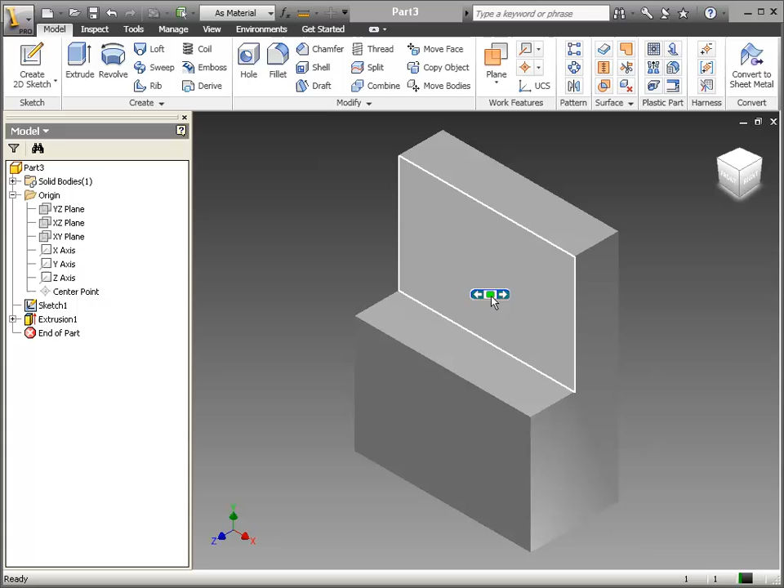Let's first start by drawing the two small holes on the top part of this object. So we're going to create a new sketch. That's another nice thing about Inventor, is we don't have to fool so much with the user coordinate system by moving it around or making it parallel to certain parts. We can just create a new sketch and actually pick the surface where we want to sketch from.

In order to place something that Inventor will recognize as a place where to put a hole, we need what's called center points, or just a point. So if you're not on the sketch tab, be sure you click there now, and then under the draw panel on the ribbon you should see the point, center point command. Let's come in and place this.

About an inch down and an inch over, and we need two of these. Technically our center point should be 3/4 of an inch over, but we'll see how to adjust that in just a second. One nice thing about Inventor, even though we have our center points too far to the left and right, we can adjust those by using a dimension.

And dimensions in Inventor sketching is different from drawing a dimension in AutoCAD, or even drawing a dimension in an Inventor template. What it does, it actually allows us to place what's called a constraint that tells how far from this edge, I click this edge first, to this center point, that the measurement should be. Right now it tells us it's an inch, but I don't want it to be an inch. I want it to be 3/4 of an inch, or 0.75.

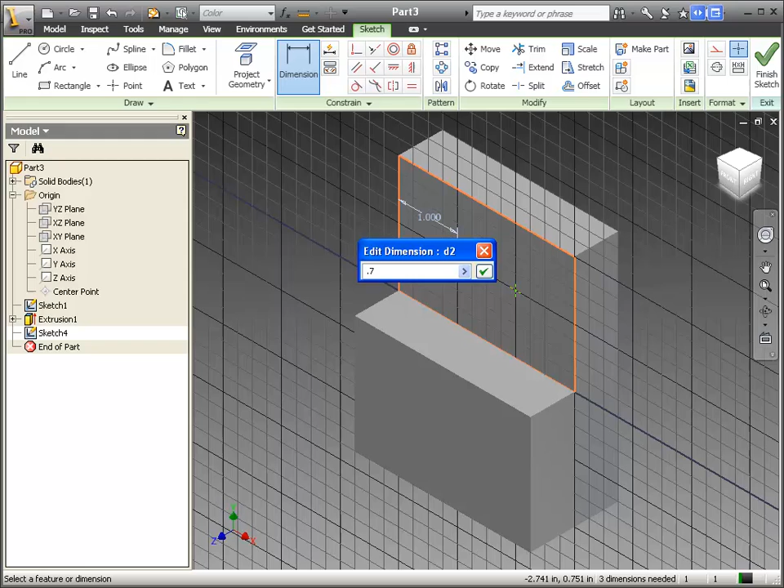So what's nice about Inventor, when we change this dimension, I just double clicked on it to change it, and then I hit the little check mark here. Not only is it going to change the dimension, it's going to change where the center point is.

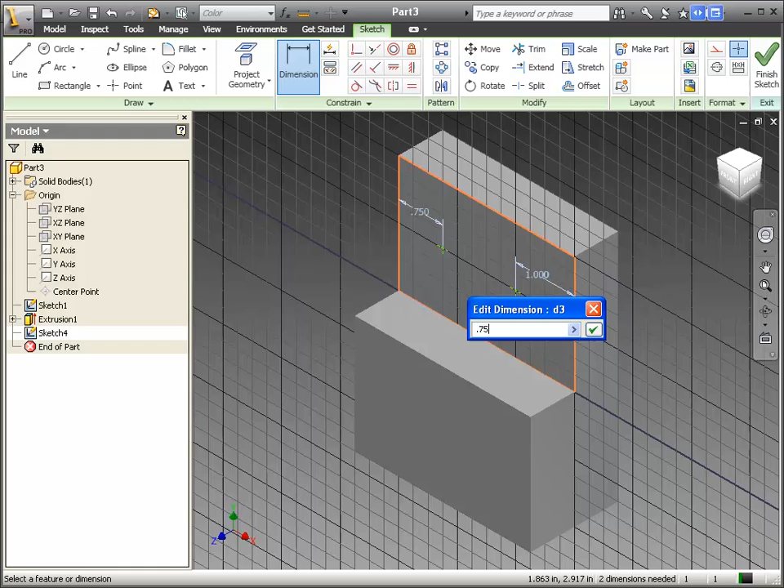Voila, pretty cool, huh? Alright, so let's do that on the other side. We're going to click the edge, then we're going to click the center point. We're going to place the dimension, double click if we need to, and put in the new dimension.

And there we have those now in the correct position. Hopefully they're the correct vertical dimension down. You can check that if you want to place another dimension constraint, but if you drew them correctly, they should be an inch down, and I'm not going to place that dimension.

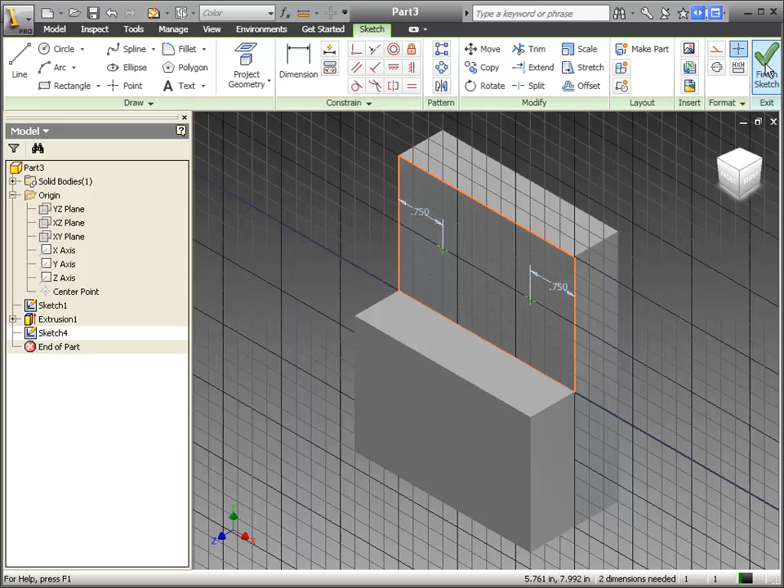So now that we have our points in the correct position, we can finish our sketch. That should take us back to the Model tab, and we're going to use the Hole command.

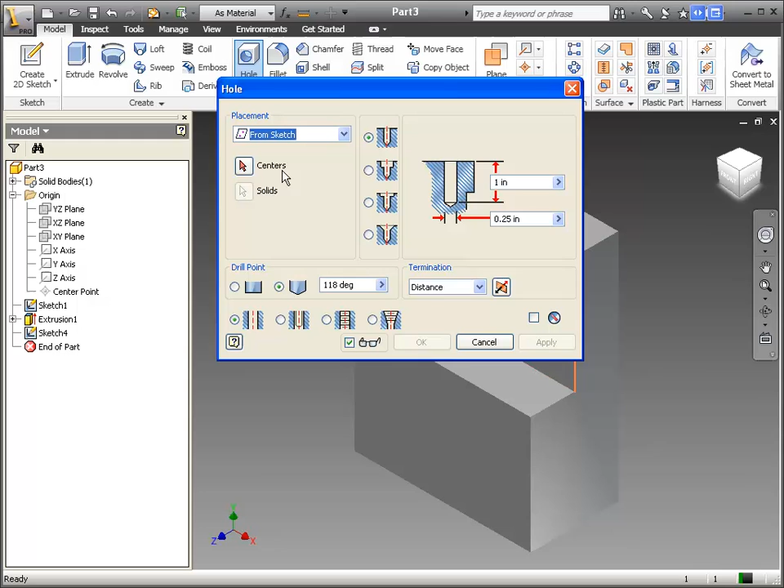So once we click on the Hole command and get the Hole dialog box, our placement by default should be from Sketch. If it's not, click that option and choose from Sketch. Then we want to choose our centers, so click on that option, move the little dialog box out of the way if you need to, and then just come and click on those two center points we just sketched.

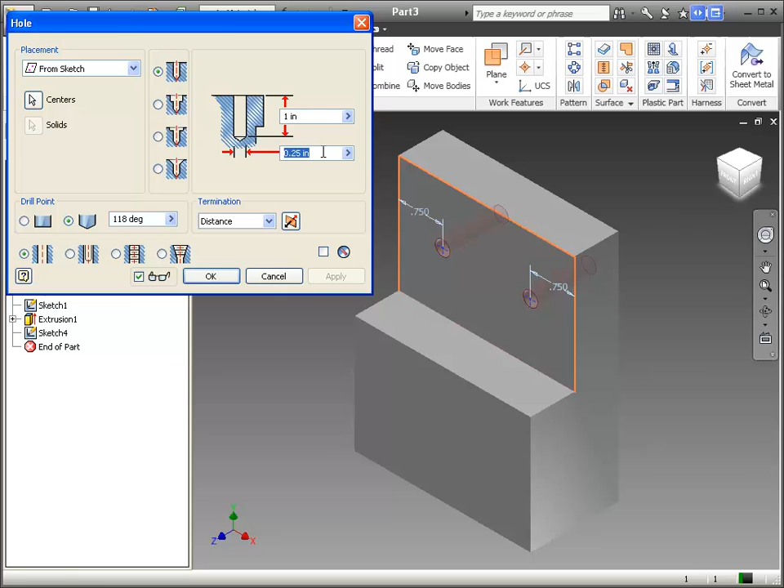And the diameter of our hole should be 1/2 inch, 0.5. So there's an area in the Hole dialog box to change that variable. So we're going to put it at 0.5.

And then we could actually control the depth of our hole, except our hole goes all the way through. So for the termination option, we're going to terminate it through all. So we're not actually terminating it, we're telling it to go all the way through.

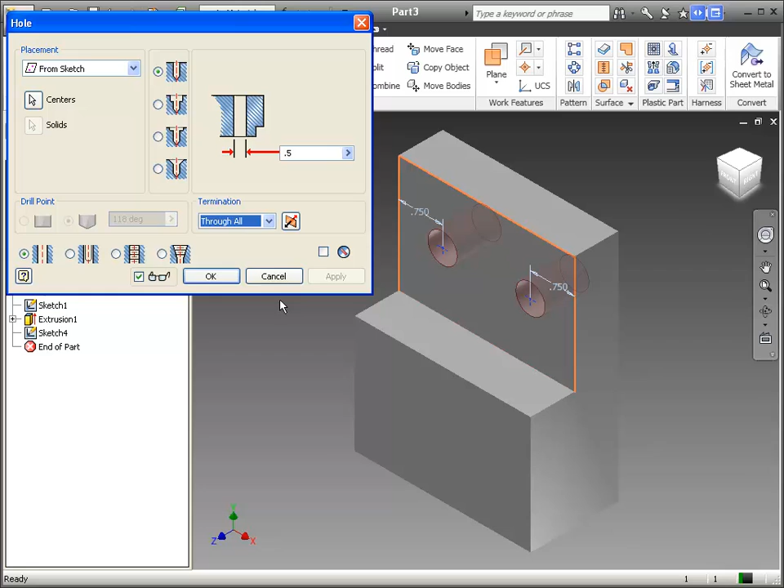So when you click OK, you should now see some holes. And if we manipulate our view cube, slide it around a little bit, you can see you have holes going all the way through.